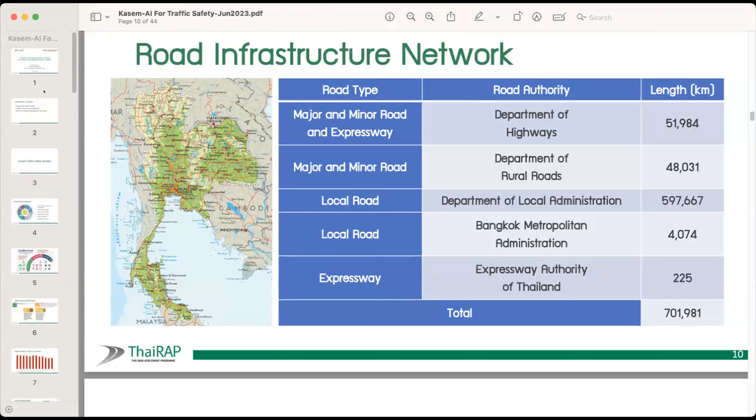And good morning, our colleagues and friends from the UK. Thank you very much for the introduction, Dr. Garavig. My name is Kasem Choocharukul. I'm actually a professor at the Civil Engineering Department at the Faculty of Engineering, Chulalongkorn University. And at the same time, I'm leading the Thailand Road Assessment Program, or shortly ThaiRAP, here in Thailand.

I have about half an hour to speak today, and what I would like to cover is the overview of the road safety situations, especially for those of you who are in the UK and might not be familiar with the Thai traffic situations. And then I will briefly discuss the Thai Road Assessment Program. And in essence, I also would like to talk about the potential of using artificial intelligence data to be applied for the Thai roads. So let's get started. These are the three things that I would like to cover today.

First of all, before getting into details on the road safety situations in Thailand, it's good that we all understand and are on the same page about the safe system approach. This is not new, I would say, and every country has already embraced this kind of concept. We believe that death and serious injuries from traffic crashes are unacceptable. We know that humans could always make mistakes, so that's something that we have to keep in mind.

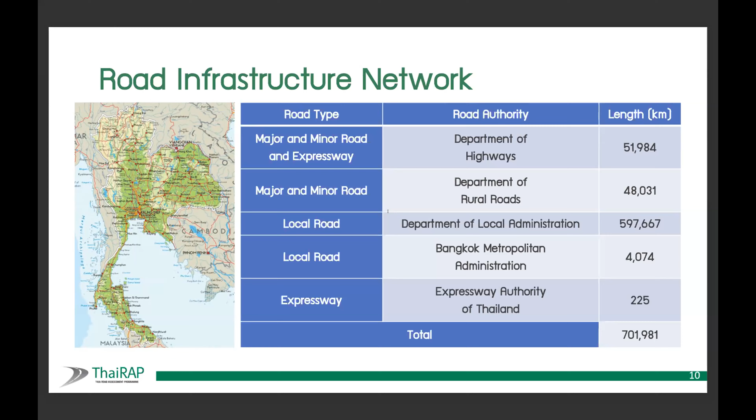That's under the Department of Highways, and it accounts for around 51,000 kilometers of the total road network. Now, coming to ThaiRAP: before we talk about ThaiRAP, everyone should understand what iRAP is. iRAP stands for the International Road Assessment Program. This is a registered charity, so it is a non-profit organization, with a vision for a world free of high-risk roads, and it's being supported by many agencies.

Mainly the FIA Foundation, and the responsibility of iRAP is to assess road conditions in terms of the road infrastructure. And so far, more than 100 countries have already incorporated this idea, the iRAP star rating assessment, for road assessment in their own country. And a lot of kilometers of highways have been assessed under this program.

And you can see that in addition to iRAP, we have some countries with their own RAP, that's the local identity under iRAP. And we can see here, ThaiRAP is one of them. In Southeast Asia, we have ThaiRAP, that's the Thailand Road Assessment Program, and MyRAP for Malaysia. EuroRAP started actually in Europe in 1999, and then we have AusRAP in Australia, usRAP in the United States, KiwiRAP in New Zealand, and then iRAP was actually established in 2006. And then up to 2012, up to 70 countries worldwide had incorporated this concept.

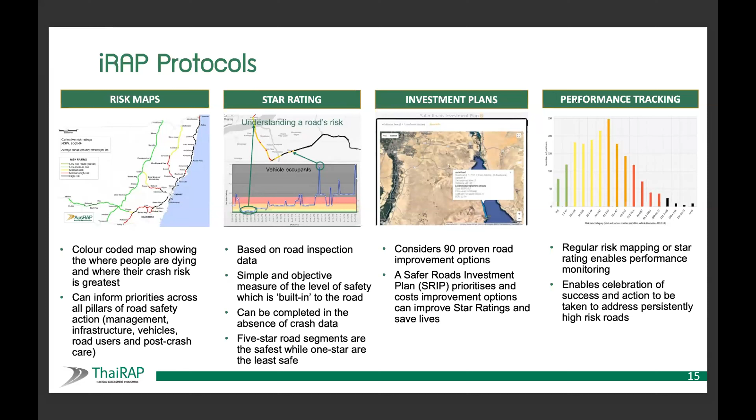Given the road condition that we have assessed, what would be the good countermeasures in terms of economic effectiveness, in terms of the investment, in terms of, let's say, the benefit cost ratio? If you spend $1 or 1 baht, what's the return in terms of the investment plan here for road safety? We also consider the performance tracking from past to present and to the future in terms of target setting. What should be our standard in terms of road safety? So this is something that we call the ThaiRAP protocols.

Let me explain a little bit more on the ThaiRAP or Thailand Road Assessment timeline. It started in 2015. At that time, we evaluated the road network in Phuket Island or Phuket Province. That was done by AIT, Asian Institute of Technology. And then during 2016, we got the budget from Bloomberg Philanthropies, and we worked together with the Bangkok administration, focusing on 3 areas in Bangkok. That's basically the start of the ThaiRAP program here. We focused on assessing Silom Road, Yaowarat Road, and Asok Montri Road at the time.

And then we further extended our collaboration with other road agencies in Thailand, like the Department of Highways and the Department of Rural Roads, and we have conducted up to now more than 1,000 kilometers of road assessment already. And you have seen the figure above already. That's ThaiRAP being part of the regional road assessment programs.

And on the lower part here, our Faculty of Engineering, we are honored to be one of the IRAP Centers of Excellence, along with other road research agencies. In the UK, that could be TRL, and we have some other road agencies also being part of what we call the IRAP Center of Excellence. So this is the entity that will look at the model inside, how we assess the roads, what are the important variables, and how impactful those variables are for road safety risk. So it's our honor to be there as one of the IRAP COEs also.

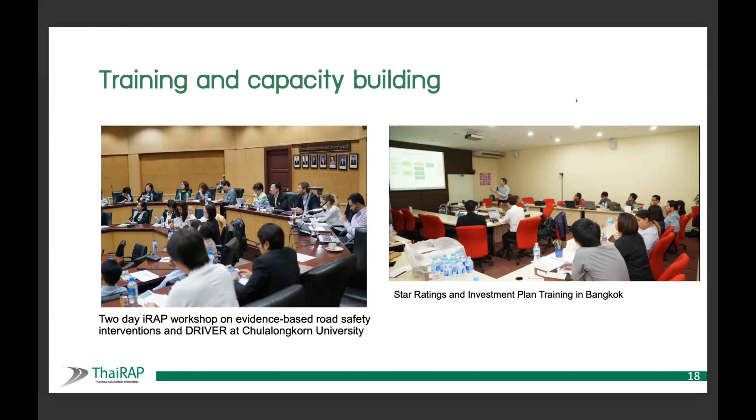So from the past up to now, we have performed trainings and capacity building, as you can see from these photos. And we have a lot of sessions going on, like introduction to IRAP, the IRAP assessment, how to manage IRAP projects, how to perform the IRAP star ratings and safer road investment plan, and so on. We also introduce the road safety audit to officials under the road agencies in Thailand. Like this one, we had the session on road safety audit for people under the BMA, the Bangkok Metropolitan Administration, in the past.

And we also have collaborations with other related road agencies. In Thailand, we work with some other universities as well, like Chiang Mai University and AIT. For the government part, we work with the Department of Rural Roads, Department of Highways, and the Bangkok city. Internationally, we work with MIROS, which is the Malaysian Institute of Road Safety Research. That's under the ministry, the government part in Malaysia. We also work with ChinaRAP, the road assessment program established in China, and similarly IndiaRAP also. So that's our collaboration so far.

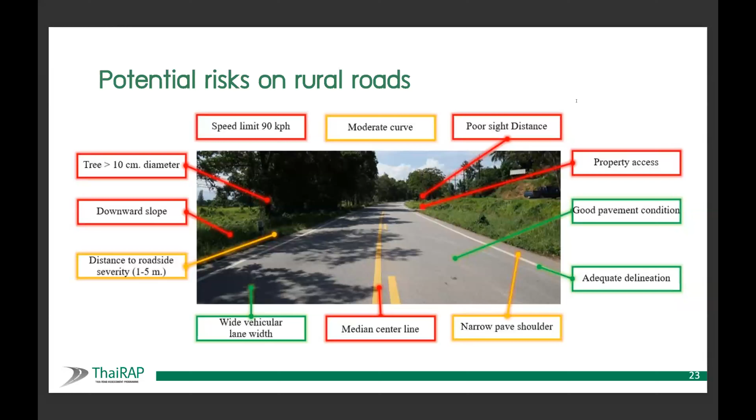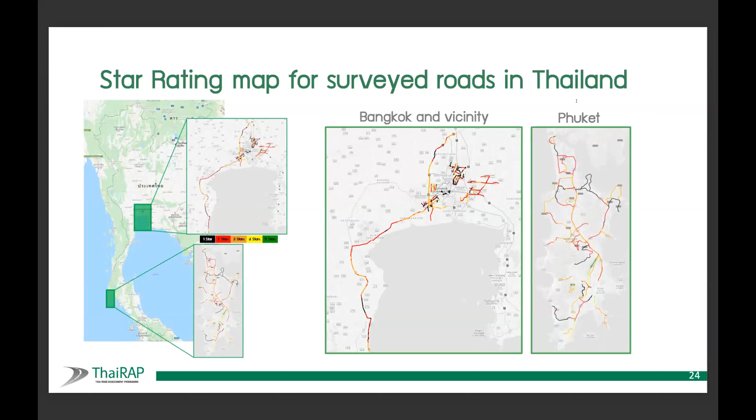Well, in terms of the result, as I said, we have already surveyed some of the highways and roads in Thailand based on the iRAP star rating concept, mainly in the Bangkok area and also in the Phuket area here. You can see by the colors of this mapping, green representing 5-star. You don't see any green here. 4-star represented by yellow, 3-star the orange color, 1-star black, and 2-star red. So you can see that most of the highways in Thailand are not that safe. So this is the evidence base. In the past, we would just say it's not safe, but we didn't have any evidence. But based on the assessment, which is consistent across all countries in the world, this is what we found. It's still not safe.

Well, why do I have to show this? Because this is the evidence showing that there must be something that we have to do. This is the evidence that we found from the road assessment. Pretend that you are a patient going to a doctor; the doctor cannot prescribe you any medicines without knowing why you are sick first. This is the symptom. We know already what really happened. So the solution is to provide suitable and appropriate countermeasures to get rid of these black and red areas. We want to achieve the World Health Organization road safety targets: 75% of the travel being on 3-star or better roads. So we have to somehow reduce the 1-star or 2-star areas for all road users. That's something we have to keep in mind.

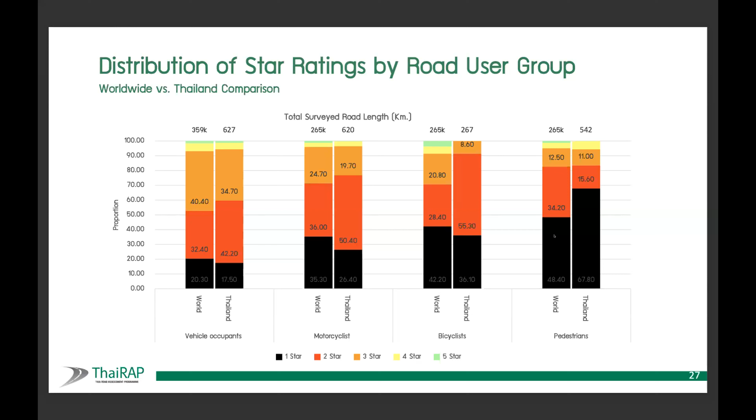Comparing Thailand to the worldwide data, the worldwide data is on the left-hand side, Thailand on the right-hand side. If we look simply at the sum of the black one and the red one, that's the unsafe situation, 1-star black, 2-star red. Every bar in Thailand is higher than the world average. That's why we have such an outcome, with a lot of fatalities, as I showed earlier. Every year almost 20,000 people die on our roads. So we can blame something on the road infrastructure, in addition to the vehicles and road users.

Now, let me quickly move to another part. That's the AI RAP and the potential applications for Thai roads. Before going in more details, let me briefly show you the attributes or the variables that we need to use in order to get the star rating. There are a lot, more than 80 attributes here.

Imagine that you have to do this coding for every road in order to find out how many stars your road has. It's very time consuming and it's very tedious. In addition to that, you have to get to know all of these attributes and how to do the coding consistently with the standards and specifications.

Here, the problem is for one road section, we have to perform the road assessment every 100 meters. So every 100 meters, you have to assess 4 road user types. For 1 kilometer of road section, you have to do it 10 times already. What about if we would like to know the overall road network in Thailand or in one certain country? Well, that would take a lot of time and effort to do all of these codings in order to come up with the star rating attributes.

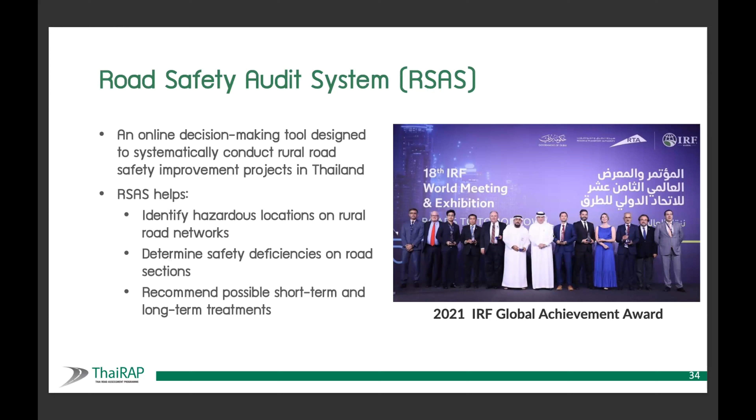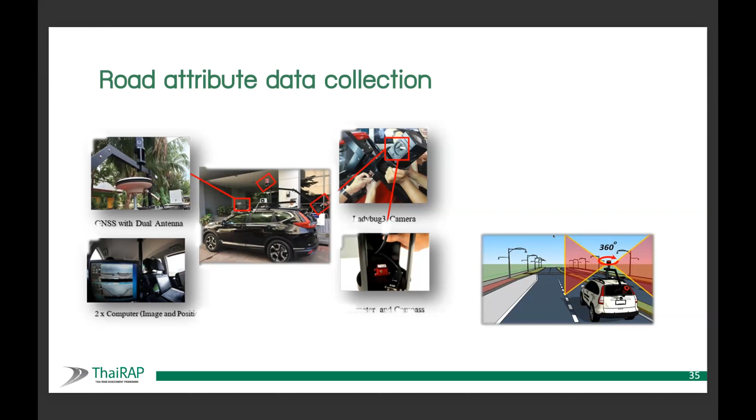So actually, this is incorporated as one tool, and they call it the Road Safety Audit System, or RSAS, under the Department of Rural Roads. And they just got the award from the IRF in 2021. They used some of the vehicle inspection data along with cameras and sensors and so on under the DRR initiatives. And this is the software where you can measure the distance. You can look at the data like Google Street View, but this is their own software.

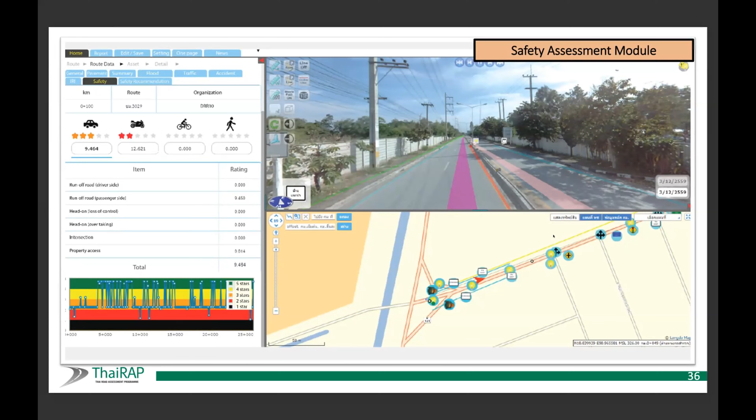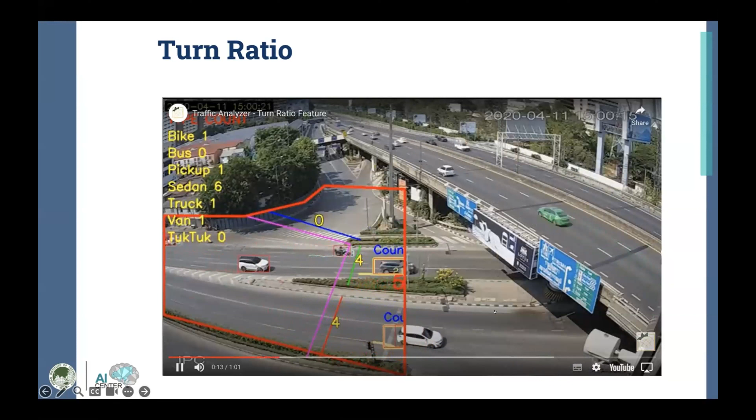In this one, we use the survey camera to tell the turning ratio. We tell how many vehicles turn left, this lane goes straight, and this one turns right to the expressway. And we could count by vehicle type: bicycle, bus, pickup, sedan, truck, van, and three-wheel vehicle, which in Thailand we call tuk-tuk.

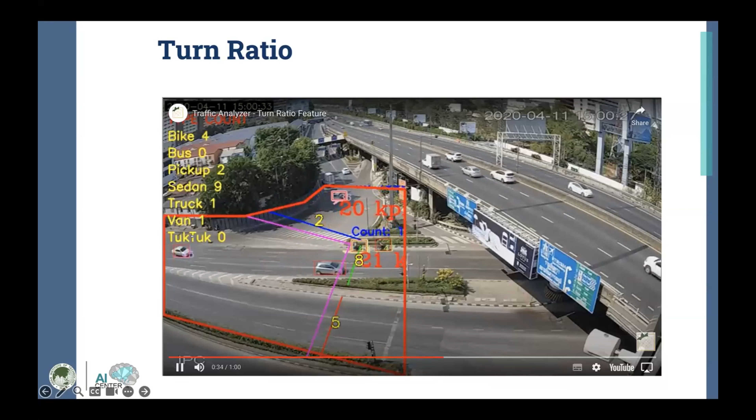This is the traffic information that we get from the system, including vehicle count, vehicle type classification, queue length, and turning ratio. This one is the mini camera that we installed on Rama 4 road. This is the technology I mentioned.

For license plate recognition, in the early days AI systems used this technology to read license plates, either for entering a gate or for surveillance applications. I'm not sure, it's quite small, but I'll show you. In this one you will see the license plate reading information.

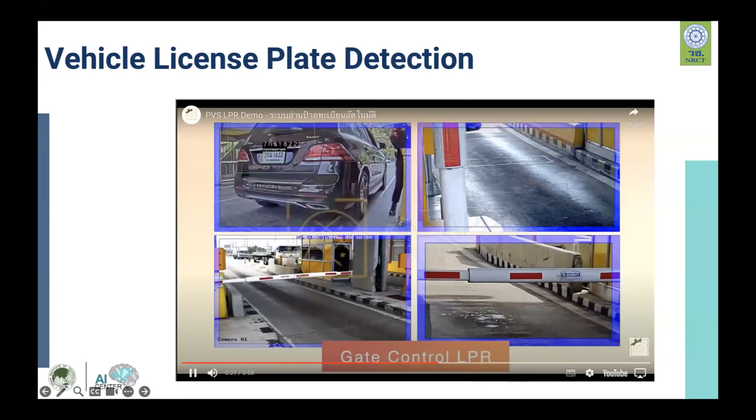We also work with the stolen vehicle police to do the same thing, but install the camera on the police vehicle so that they could drive around the city and use the camera installed on the police vehicle to detect any blacklisted, any stolen vehicle.

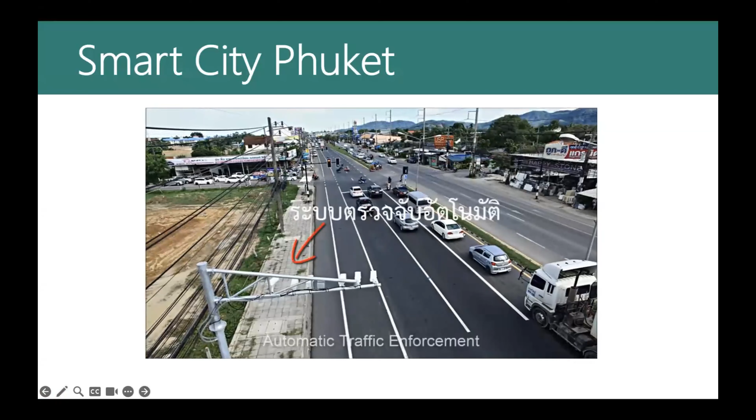And then we prepare the data for the ticketing system so that the police could use it to issue the ticket. This one is the installation site. We installed it at 9 junctions in the Phuket area.

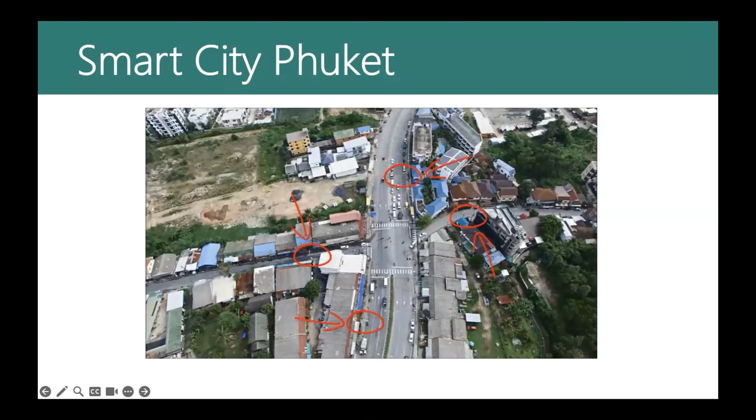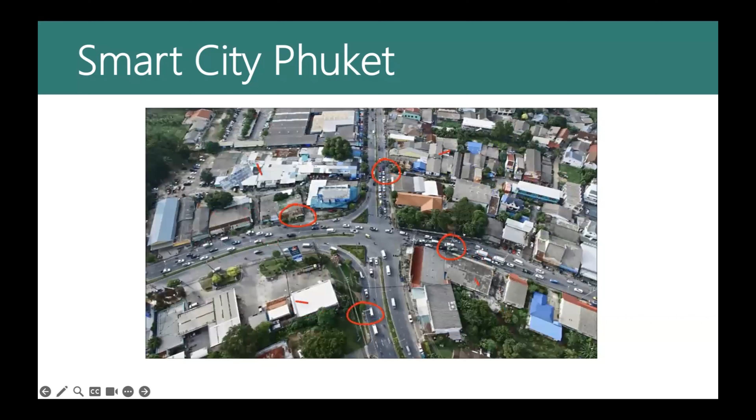This one shows the system that we use. It has cameras, and we also install radar to detect vehicle speed, because under the police requirement to issue a ticket for a speeding violation, you need either laser or radar.

These are some sites where we already deployed the red light violation system, including Phuket, Lopburi, Chachoengsao, Nakhon Sawan, and Udon Thani.

This one also uses AI technology to detect lane change violations. If a vehicle crosses the line here, the system automatically detects it and sends the data to the traffic police. This problem could cause accidents and traffic congestion, and it violates traffic law.

This shows the example of the system in the Huai Khwang area in Bangkok. Then we define the processing region. Then once the vehicle crosses this region, in this one we have the overview cameras, and then HD is the high definition camera to try to read the license plate in those areas.

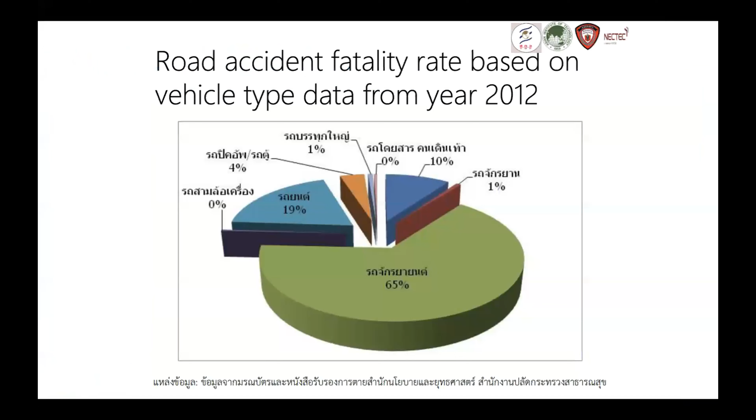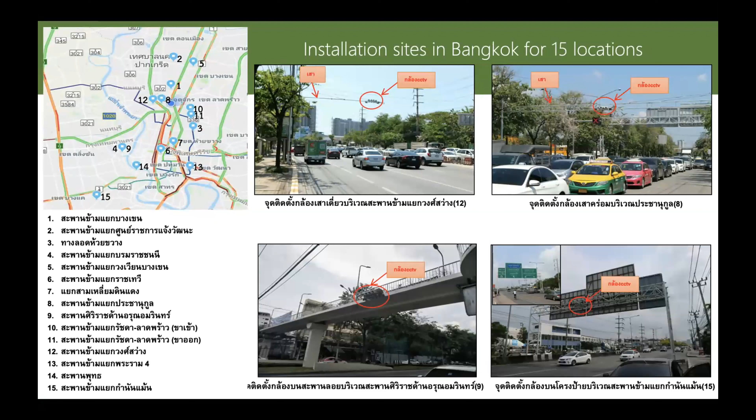Then these are the 15 locations where the system is installed in the Bangkok area. And then this one, we also deploy the no helmet wearing violation detection system. This one we deploy in Phuket and Udon Thani province. Then if there are motorcyclists that do not wear a helmet coming into the detection region, the system will detect and alert automatically.

Then we get the picture of the violation and then the license plate information. And then we send this data to the traffic police. This one is a 5 second video of the violations.

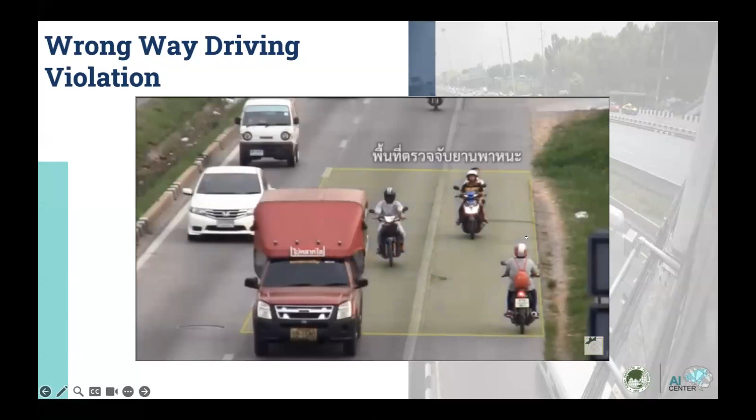And then this is another violation that we see often actually in Pathum Thani, the wrong way driving violations. And it's quite dangerous in Pathum Thani when you drive over there. Then this one, we detect the wrong way driving, and then we collect the evidence and send this to the police.

Then this one is the work that was done with Dr. Kanavi. This one we call point-to-point speeding violation. We installed the system on the Don Mueang Tollway. In the past, the police had to use the laser gun to check the speed of the vehicle and then issue the ticket.

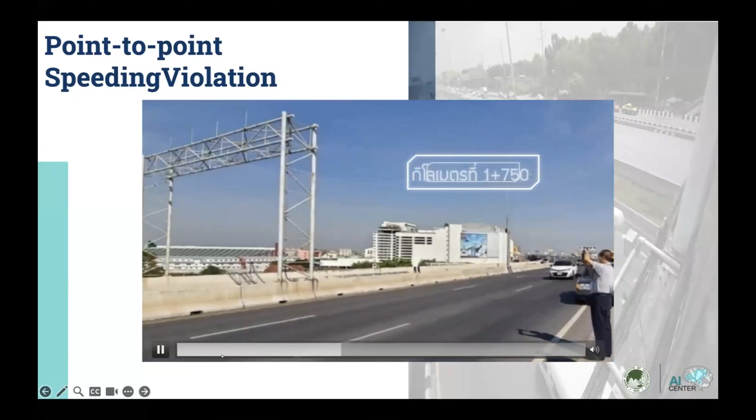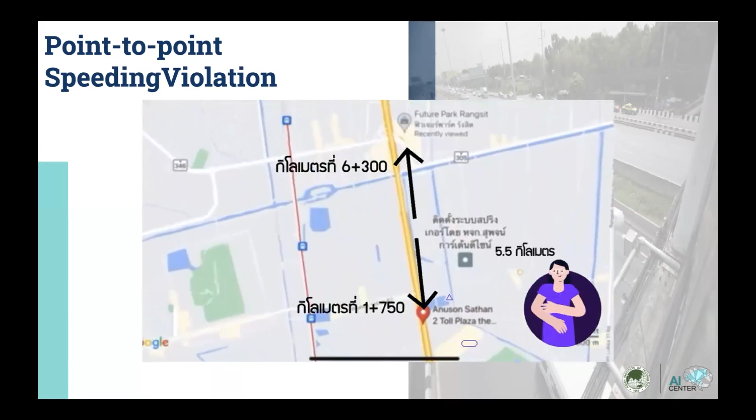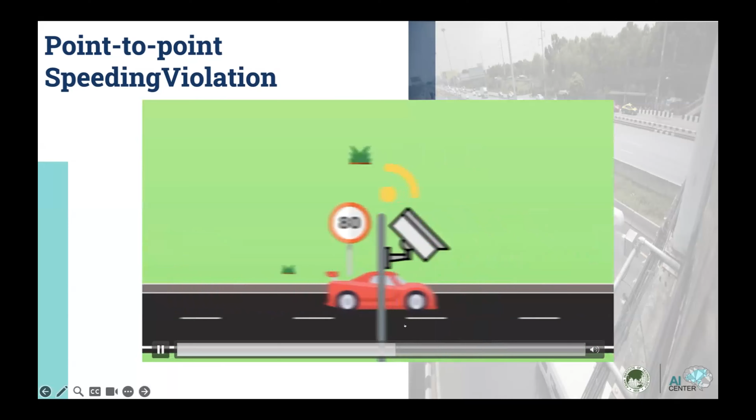Then we install the cameras in two locations on the Don Mueang Tollway. The distance between them is around 5 kilometers, 5.5 kilometers. And then once the vehicle passes, let me check. Okay.

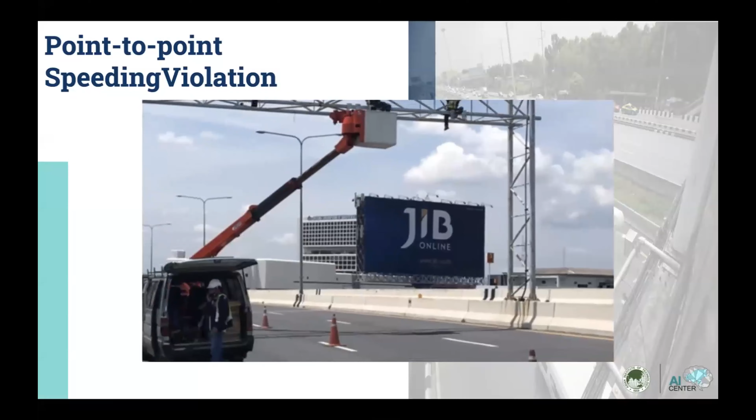Then once the vehicle passes the first location, we collect all the license plate information. And then once it passes the second location, we use the difference between the timestamps to help calculate the vehicle speed, right? And then from that, we can check whether the vehicle violates the speed limit on this 5.5 kilometers or not.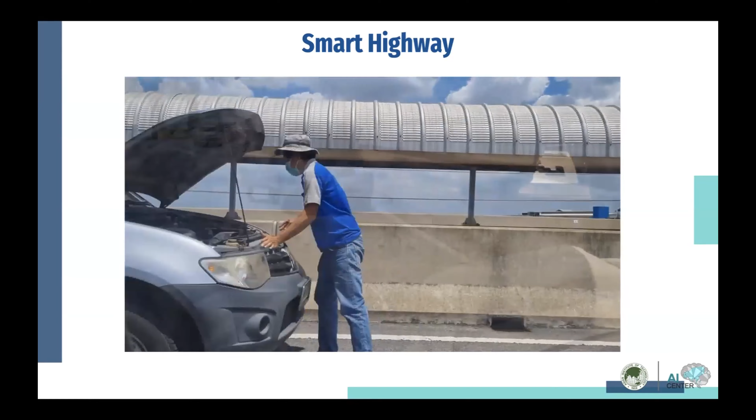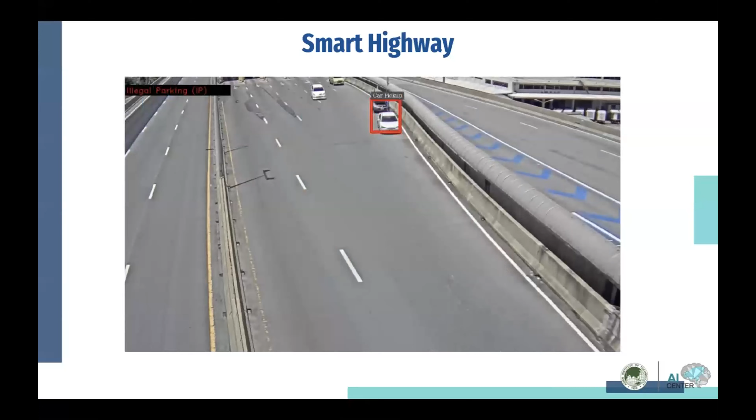Then we use the AI system with deep learning. The anomalies include parked vehicles on the tollway, wrong way driving, falling objects, and humans on the tollway. We also collect statistical information like vehicle speed, vehicle type, number of vehicles, and use that to update the map in the control room of the Don Muang Tollway.

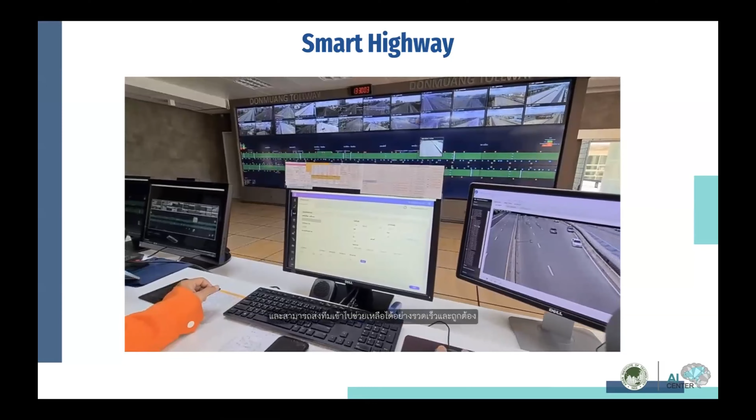Then this one is the control room. The green region means that the vehicle speed is quite good, right? Otherwise it can change to orange color and then red color. The blue dots on the map are where the cameras are installed. Then if an anomaly is detected, it alerts as shown on the video wall.

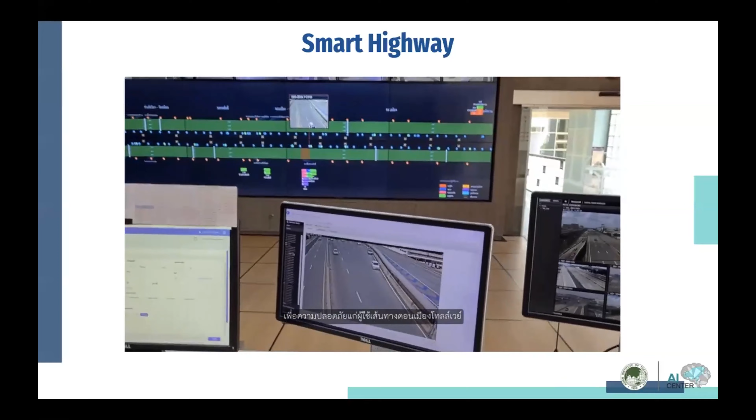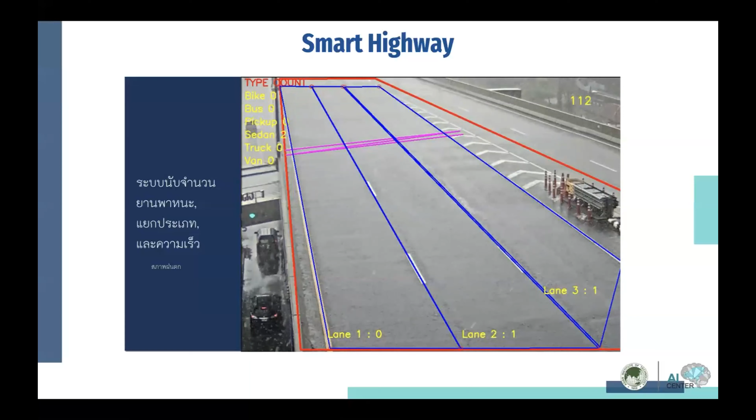And then the security guard can dispatch the rescue team to help those who have a problem with their vehicle or to collect the falling objects. And then during the testing time, Don Muang Tollway tested during rain at night time, rain at daytime, and so on to check the accuracy of the system.

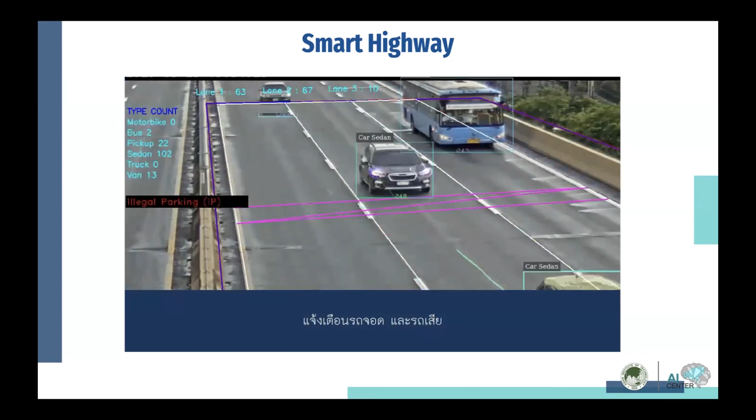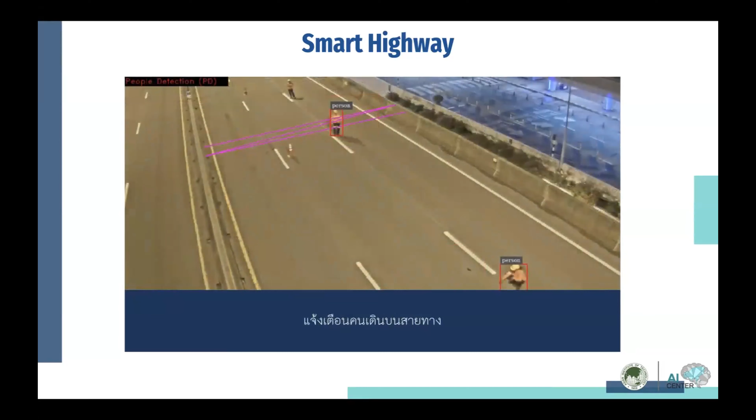Then this one is an actual scenario when there is a bus that had some problem with its engine, right? And the system could detect it automatically. This one is wrong way driving, but it's by the DMT vehicle themselves. And then this one also detected a human on the tollway. And this one is the police motorcycle.

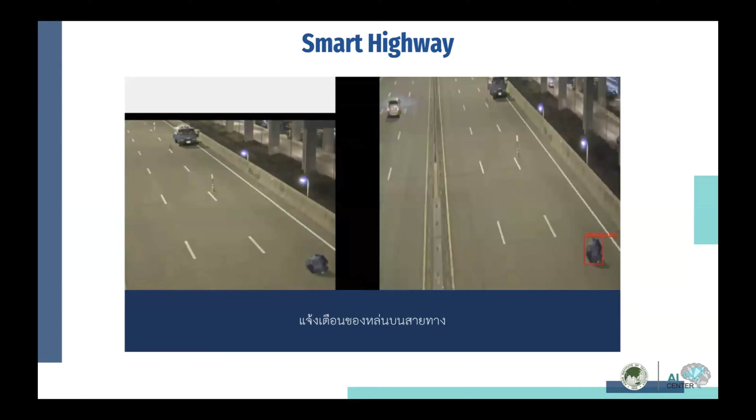It also detected it. Then this one detects a falling object, but it's a set up scenario where the Don Mueang Tollway people go and open an umbrella. And then this one, the system is tested by a company in Japan. Okay.

Then this one, we also install a similar system, but this one is on the Chanchuli Tower. This one is for the Ramapho project. If there is any accident or any stopped vehicle on the Thai-Japan bridge, right, then the system will alert the officer. Then in this scenario, in the real scenario, that system could detect automatically. There is this vehicle that comes and stops in the middle of the road.

And then these are some examples of images that we could capture from the Thai-Japanese road, Thai-Japanese bridge. And then this one is to detect the motorcycle accident, right, using the AI. And this is the actual scenario.

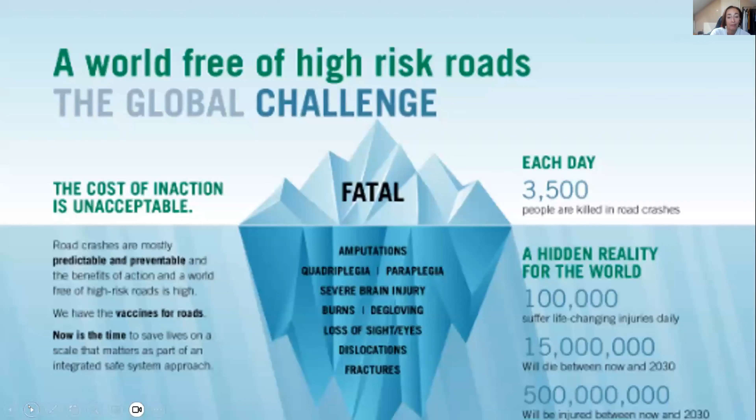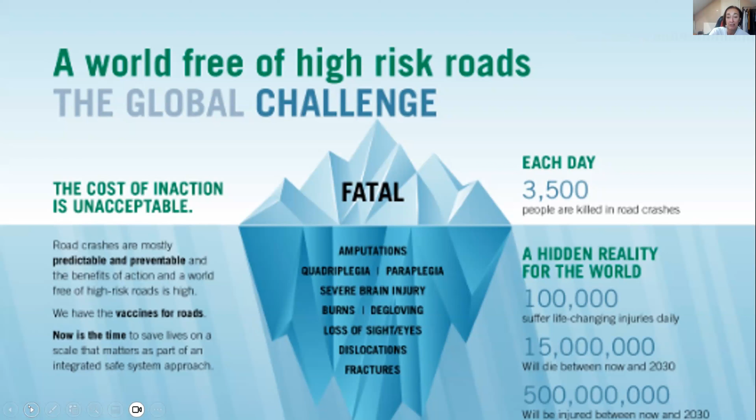And it was very interesting listening to the ThaiRAP. I'm very familiar with the ThaiRAP programme. And yes, we do want a world free of high-risk roads. And we know that things like the fatal collisions are only the tip of the iceberg. For every fatal there is what they call a whole hidden reality of things like amputations, quadriplegia, paraplegia, brain injury, where there is actually no end point for these people, and these disabilities carry on throughout life. So these are a huge burden to individuals and society. So fatals are one thing, but there are many other incidents that happen after this, and we need more data on them.

So hearing some of the horrendous numbers in Thailand of fatalities, these may look very small figures to you. But for example, in Great Britain in 2021, 111 pedal cyclists were killed, and 4,000 reported to be seriously injured. And again, as I say, seriously injured could be head injury, it could be amputation, and life-changing injury, which, as I said, has no endpoint. Another part of my research is looking at the consequences of these injuries for people, and we know that they continue throughout life and affect people's well-being. So in London, only 7 people, I say only 7 people, killed, and nearly 4,000 people were in the bracket called killed and seriously injured.

But we also know that, especially during the pandemic, cycling journeys increased hugely. And I was very interested to hear from the previous presentations by Dr. Kasem and Mongkol that getting that exposure data, how many people are actually out there doing things, is a very expensive part of survey work. And if we can automate that, that's really, really important. So we need to contextualize these injuries amongst how many people are doing this activity. If many, many more people are doing it, it may look like there's an increase in casualties, but actually it's become safer.

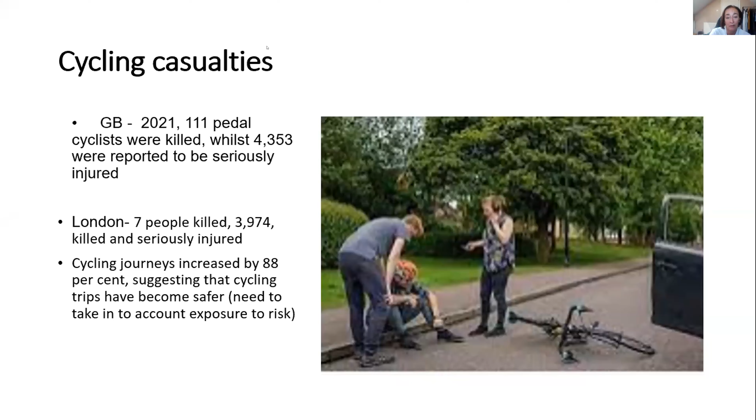I hope everyone can hear me. Okay, good. So, oops, sorry.

To actually get data on something that's a relatively infrequent occurrence is quite difficult. So I was involved in a piece of work that looked at historical data over several years in order to understand these risk factors in depth. So we looked at police fatal files. These are in-depth investigations where they'll look at the behaviour of the cyclist. Was there any CCTV surveillance available for where the collision happened? And this is based in London. Understanding the collision partners: what were their behaviours? If they were lorry drivers, where had they been delivering? At what stage in their delivery shift were they? To get the full understanding of this.

So these are the very infrequent events. Fatalities are just the tip of the injury iceberg. And for every fatal file, and we had to go through a huge amount of ethical procedures to be able to access these, we supported it also by looking at the Google Street View of the location to see what the location was like and what countermeasures had been put in as a result. So this is 5 years of data that yielded 79 fatal and life-threatening collisions. There were only 1 or 2 life-threatening collisions involving cyclists, where people had lost limbs. But there were only 53 available for analysis. The reason for this is that if there are ongoing legal proceedings, we're not allowed to look at the cases because they're not complete cases. And this is something that will probably happen in any country.

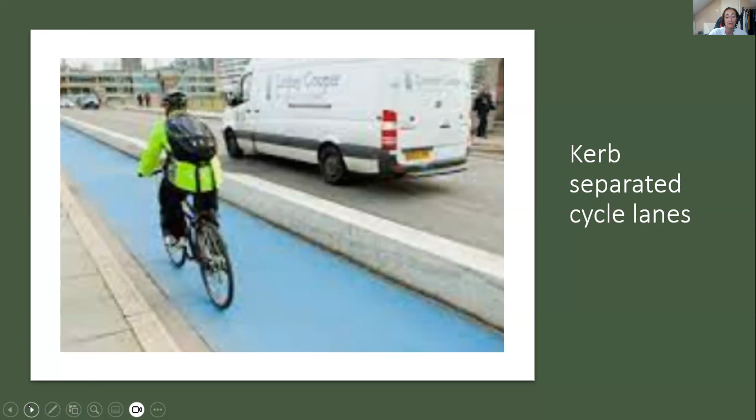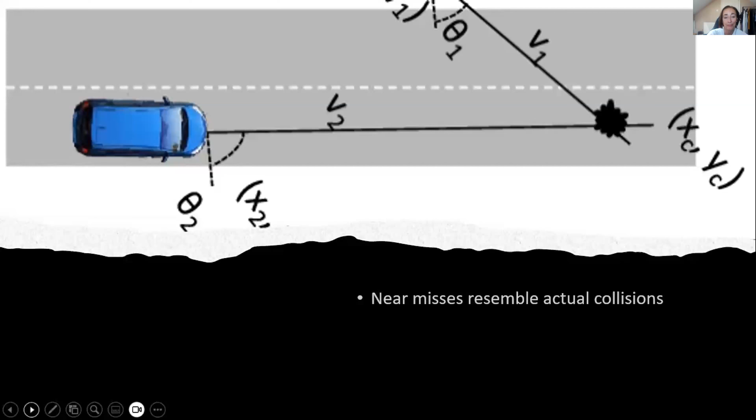So taking that in mind, we can work on understanding these more numerous data to inform our understanding of risk factors. So as I said, ideally with some kind of AI, we can actually start to predict actual collisions from understanding near-miss data. And this is a project that James will talk about a little bit later.

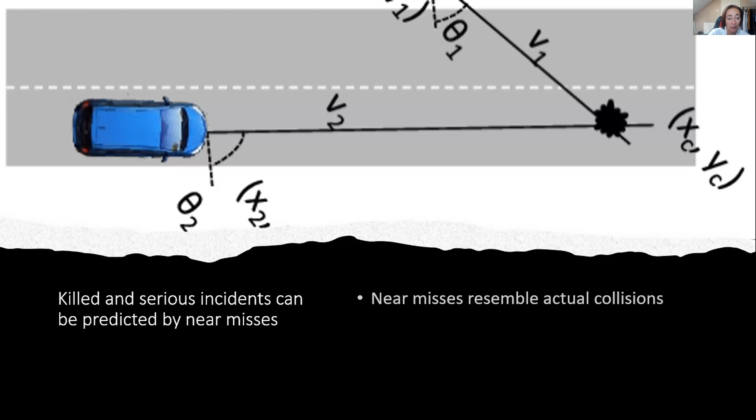And you need to conceptualize safety events within a safe system. I'm sure many of the Thai participants will understand the safe system. So this is really about safe roads, safe speeds, safe road users, safe vehicles, and post-crash care, so that there is an emergency response that can get to those people very quickly. And so we need to understand all aspects of these factors, and we need to understand safety culture. Now, safety culture is very close to my heart because I do a lot of work on occupational road safety.

And I would say that my work looking at motorcyclists in the gig economy in the UK and the tech companies that support that kind of work is pathological. They don't care about people's safety. They produce work that's highly pressurized, with no safety training, and people just go there and do the work, and we know that they report more risk than an ordinary cyclist. And I would describe the next level up as reactive.

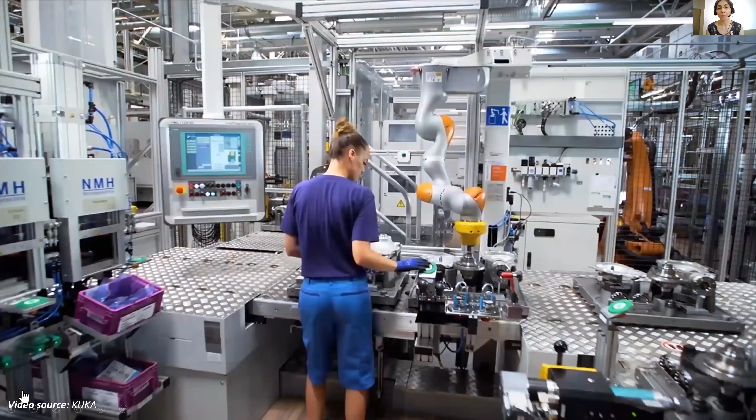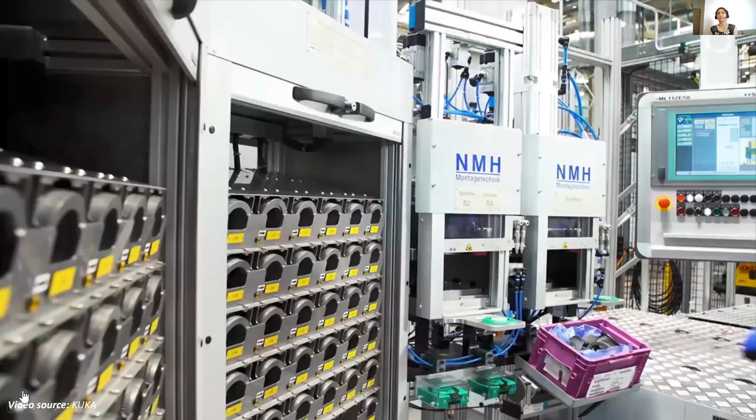This trend has moved to collaborative robots, and here you see an example from KUKA, where humans are safely working alongside robots. And for this type of robots, a new generation of robots, collaborative robots or co-robots, have been generated, and the trend continues this way.

Robotics and automation has been also supporting transport and mobility services, and I give a few examples here to you. For instance, the autopilot in commercial flights, which have been introduced from 1912. Most of you might not be aware, but when you are traveling from A to B using an airplane, 90% of the times they make use of autopilot while getting you to your final destination.

Another example is the automated metro system, which has been around since the 1920s, and one of the examples is London's Victoria Line, which is the world's first newly built full-scale automated railway. And this trend continues towards autonomous vehicles, where there have been experiments for over 100 years. And now we are at the stage where different levels of autonomy are in place, and people basically agree on definitions of different levels of autonomy.

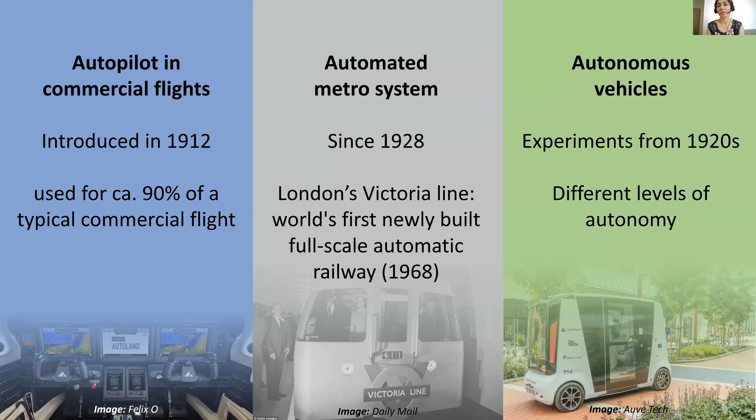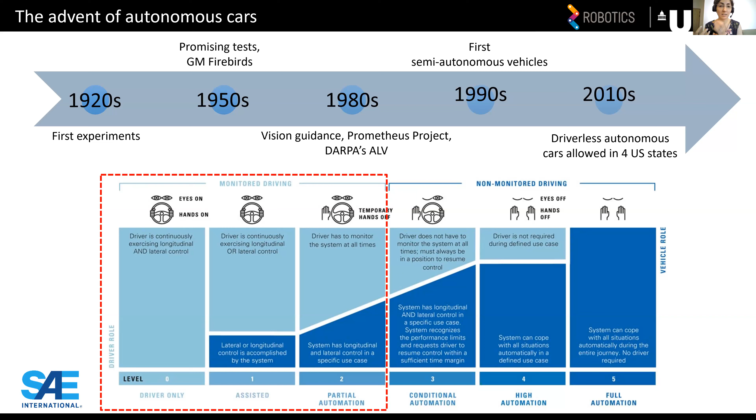Many of you might be familiar with this, but I quickly go over the definition from SAE, which talks about levels of autonomy ranging from 0 to 5, 0 being fully manual and 5 being fully automated, where you almost don't need the driver anymore. On our roads at the moment, we see commercial vehicles with up to autonomy level 2, where the driver still needs to be engaged in the driving task and observe the environment and monitor the system at all times.

However, last year, Mercedes-Benz introduced the first internationally valid system which is approved for conditional automation, or level 3 automation. What is important here to note is that they highlighted that this type of vehicle is suitable for motorway sections where the traffic density is high. The vehicles are also not allowed to go more than 60 kilometers per hour on these motorway sections; the legally permitted speed for this type of vehicle is 60 kilometers per hour.

There have been many predictions regarding the revenues that these vehicles can produce. I'm just bringing an example from McKinsey & Company, where they have said that advanced driver assistance systems and autonomous driving systems could create $300 to $400 billion in revenues by 2035. They said that autonomous driving could produce substantial value for drivers, for the auto industry, and for society.

Within my team, we are interested in looking into integration of autonomous vehicles and systems into our society. So on one side, we look into integration of autonomous shuttles into our urban environment. And on the other side, we look into creating human-centric, intuitive interfaces for autonomous vehicles, where we are trying to help drivers with the task of handover when it comes to highly automated vehicles.

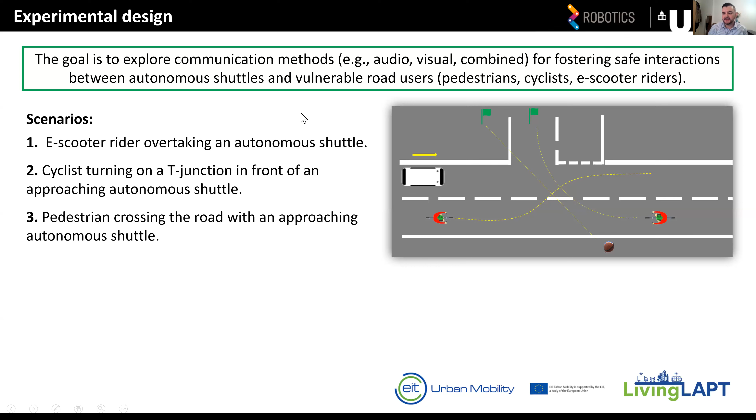So the first scenario was an e-scooter rider overtaking a slowly moving autonomous shuttle. The second one was a cyclist doing a right turn at this intersection in front of the incoming autonomous shuttle. And the last one was a pedestrian crossing the road in front of the shuttle. And the experimental design was very simple. Next, please. It was a 4x2 factorial design. We had 4 means of communication and 2 environmental conditions.

So we had nothing, meaning there was no communication from the shuttle. There was visual communication by means of a laser projection. So we had the laser attached to the front of the shuttle, and it was projecting a red line onto the floor in front of the shuttle, indicating a space in which the shuttle would brake intensely should something come in. We had the audio message playing from the speakers on the shuttle. This was an AI-generated male voice saying, "Mind the space" in front of the shuttle. And we had the combination of audio and visual.

In terms of the environment, we had night and silence within the lab. The other one was very bright daylight, plus traffic noise being played in the environment. So now I want to show you in the next slide a video recording of what one of these experimental runs looked like. This was during the night. You can see the laser projection. I'm not sure if you will be able to hear the message, but it's saying "Mind the space" in front of the shuttle. As this e-scooter overtook, the shuttle slowed down, it was braking, and then it continued its journey.

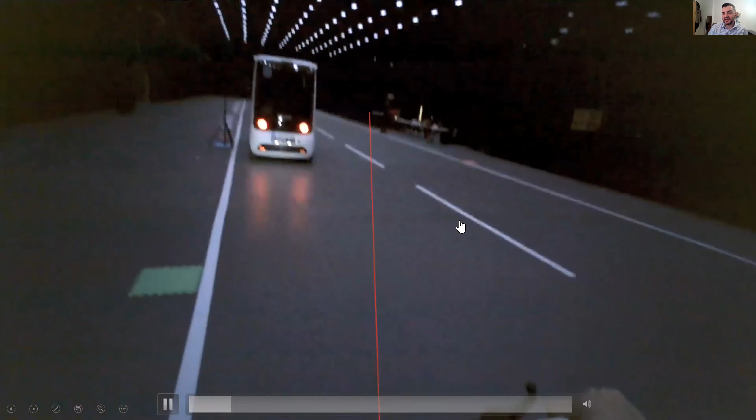So now I want to show you the same thing, but this is the first person view of the same e-scooter rider. This was recorded with eye tracking glasses. And what they also give you is this red point showing what the person is focusing on.

So hopefully you can see that this participant did notice the laser projection as they dwelled for a while on that point. So we had 8 experimental runs for each participant. And then we did a short questionnaire, which we gave to the active participant, in this case, the e-scooter rider. And we also gave the questionnaire to 3 people sitting inside acting as onboard passengers.

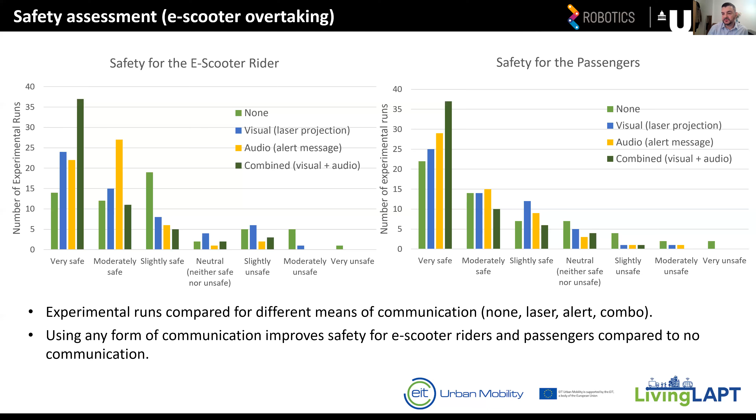And the first question was, how safe did you feel during the interaction that you just experienced? So we are happy to see that our participants felt predominantly safe during these experiments. And there are some differences. So when nothing was used, there was no communication from the shuttle, it peaked around slightly safe for the e-scooter rider, but when something was used, either visual or audio, it became moderately safe, and with the combination, it was very safe. So this shows, if nothing else, the communication can improve the feeling of safety of road users and onboard passengers.

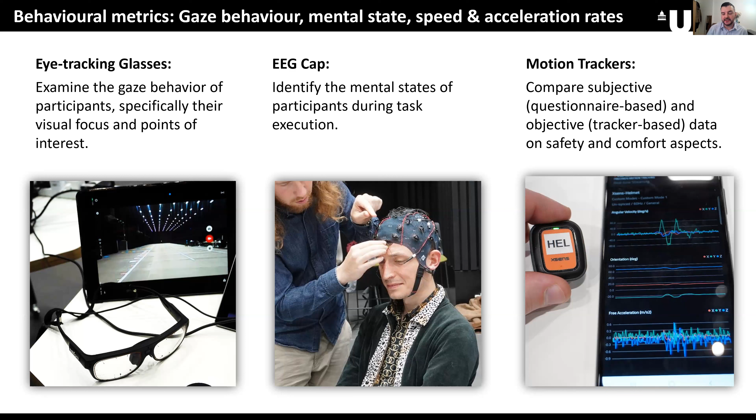We had eye tracking glasses for every active participant, as I've shown you before. We had an EEG cap for the pedestrian to record brain activity. And finally, we had motion trackers, these small devices that we put, for example, on the back of the safety helmet. So this recorded the orientation of the head, the free acceleration of the scooter, angular velocity. And we also put one of these devices inside the shuttle. So this gave us an objective measure of the intensity of braking, which we can then compare with the subjective ones from the questionnaire. And last but not least, we had lots of overhead camera footage of all interactions for all three scenarios.

So we intend to use AI to detect objects in the scene and then to quantify distances between active participants and the shuttle in the very moment of interaction. So for example, for the e-scooter scenario, we want to quantify the overtaking distance in front of the shuttle, as well as the lateral distance as they're approaching the shuttle. And this will answer one of the very important questions: did they or did they not change the behavior when there was communication from the shuttle, drawing attention to the space in front of the shuttle? So as soon as we know, we will make sure to disseminate these findings.

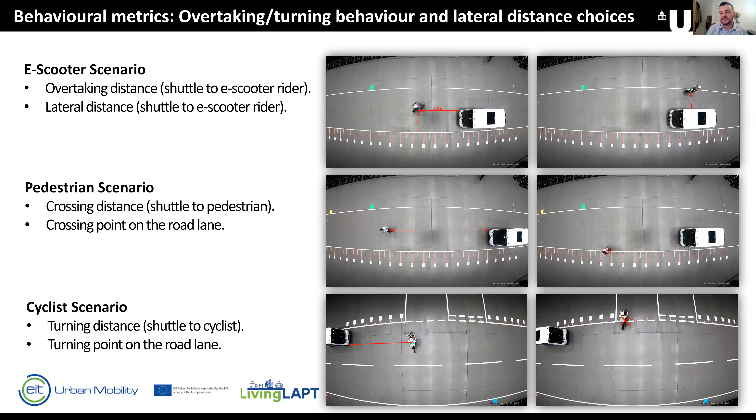You're muted, Bani. Sorry, thank you very much, Milan.

Now we are moving towards the second strand of research that we are looking into, which is on intuitive human-machine interfaces for autonomous vehicles. And within this topic, we are going beyond visual and audio feedback, which you see in commercially available autonomous vehicles. We have developed a haptic driver's seat, which Gianluca is going to talk you through, and I will hand over to Gianluca at this point.

Hi all, thanks that we can be here.

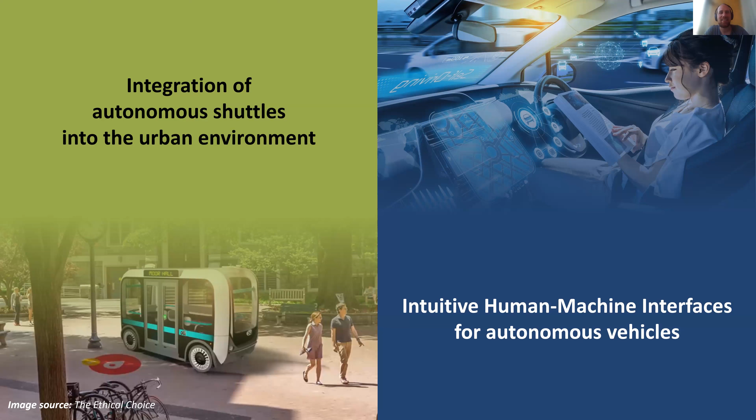Right, so we've heard just now that we now have first vehicles in autonomy level 3. So basically cars where you can hand over control to the car and you don't have to monitor the road around you at all times anymore. But this is conditional automation. So at one point the car will ask you to take back control if you're the driver. And obviously, if that happens immediately, you have no idea what's going on around you.

And that is then a very unsafe transfer, because imagine you drive on a highway, even if it's only 60 kilometers per hour, there's a lot going on around you. This driving task is, after all, a very dynamic task. So we're looking here at how we can make this transfer of control from car to driver more safe.

And one of the main ideas here is that we measure eye and brain activity of the driver in a driving simulator, and then employ artificial intelligence and machine learning to understand at any given point how much situational awareness, so to say, how much knowledge about the environment they have, and then give them appropriate feedback early enough so that they can take over the driving task in a safe manner. This is pretty much backed by research.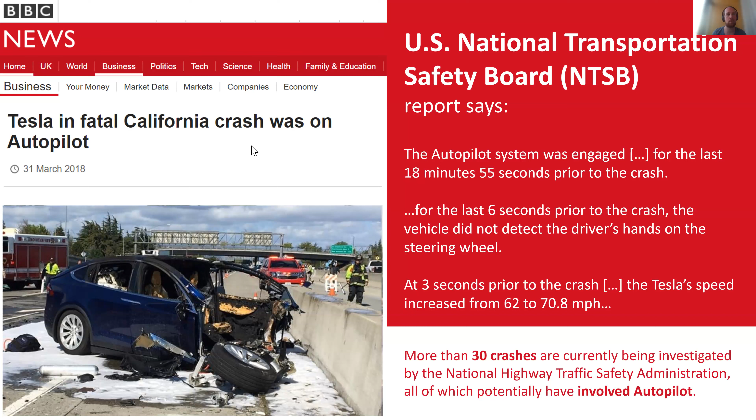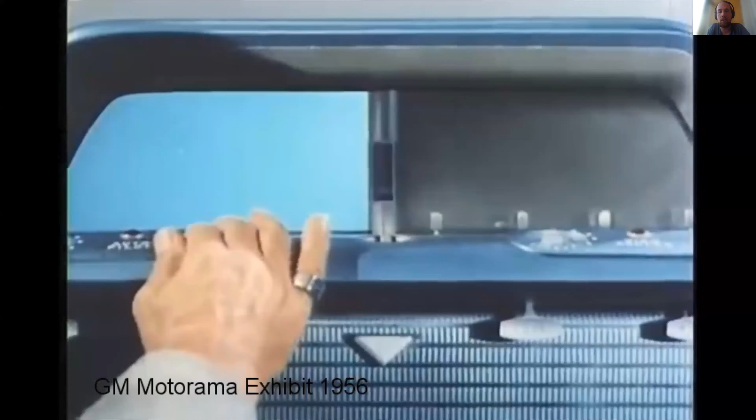So in 1956, GM had this futuristic vision, let's say, of some sort of road traffic control, just as we see it in air traffic, where we have air traffic control, where basically you switch to another lane and then you do some fancy stuff on your screen while someone talks you through that, and then you're suddenly in autopilot. Obviously with the amount of cars nowadays, we didn't go this way. There is no road traffic control where a controller would talk to you at every given point. So we're very much dependent on vehicle to user or vehicle to driver communication.

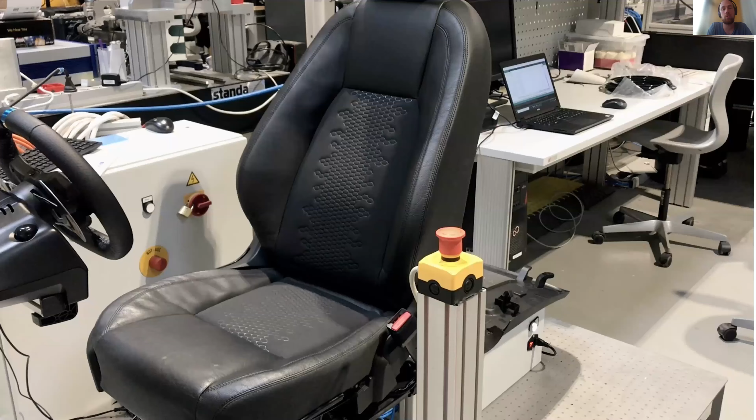And state of the art, as most of you might know, is visual and audio feedback. So visual means there's some sort of little icon on the dashboard, or maybe a bit removed, something bigger, some red screen popping up to tell you, please take over now. Audio is that you hear a beep sound of some sort that gets more and more alerting over time if you don't take back control. But now that you're actually allowed to engage in other tasks, so let's say you're allowed to watch a movie or something, you might not catch these. And this is exactly what these fatal crashes also show.

So we thought, why not build haptic feedback? So basically giving you feedback through a completely different sense. And then the only real connection you still have to the car is the driver's seat. So here you can see we have built soft robots, so to say little air cushions underneath the leather of a real driver's seat that then inflate and deflate to give you this mechanotactile sensing touch. And this research has been published already. It has won several prizes as well in national and international competitions, for example, by Ocado and the BMW group.

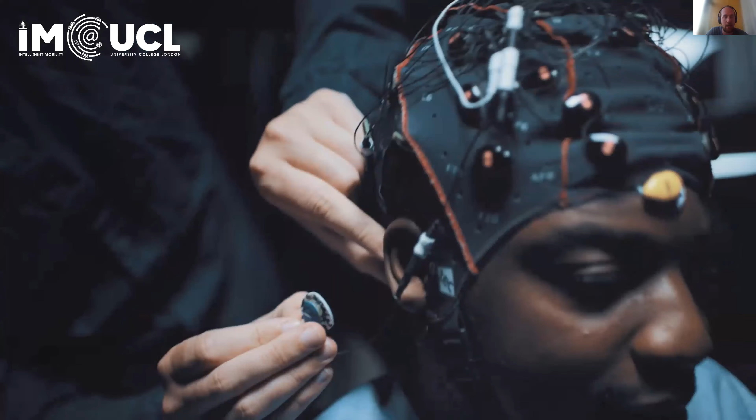So this is our facility in East London at UCL Pearl, where all of this comes together. So we have a real size car simulator here. It's a real car with a screen around that is plugged into our in-house developed simulation environment. And of course, we have audio and visual feedback there, but we also have the driver's seat in the car. So it's very immersive. The participants can't really see the edges, so they really think that they're sitting in a real car, which gives us just this hunch of reality, really, when we do our experiments.

So in a first step, we looked at how well the seat is received. And this is on the next slide as well. How is the acceptance? So to say usefulness and satisfaction. How do people perceive it? What is the intuitive feeling? Intuition is very big in driving, like intuition and experience. And how user-friendly and how effective is the feedback we give.

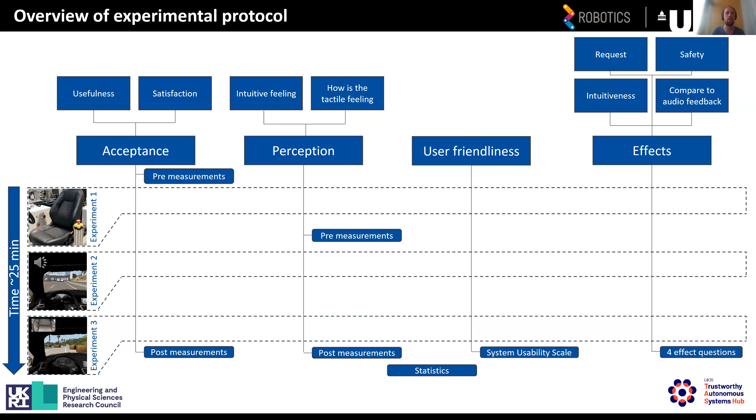And we then also compared it to results we had from a visual takeover system from a BMW 5 Series car. So very much something that is already in use. And ours almost all the time scored higher, both for usefulness and satisfaction.

So with these results, we then went one step further and we said, how can we understand how much situational awareness these people get, and can we get successful transfer of controls by giving the people haptic feedback on top of audio and visual feedback? And for this, we designed a highway scenario. The car is driving on the motorway. And the participant who's sitting in the car is reading a magazine the whole time. So they're basically very much removed from the driving task.

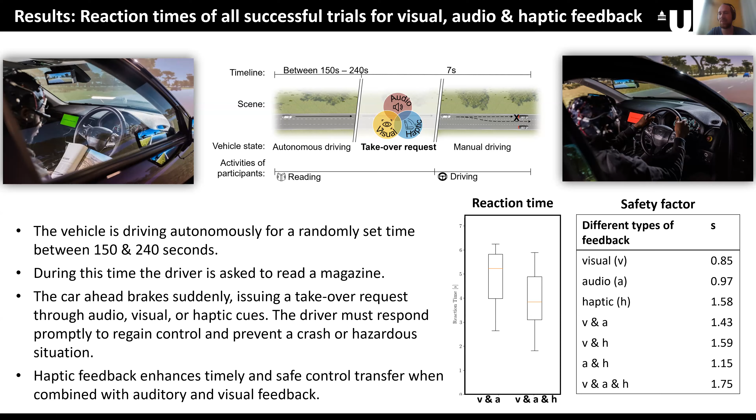Thank you so much. Thanks a lot.

And of course, these are some of the challenges that we are looking into, and there are many more challenges that within this field we are facing, such as issues of communication networks, vehicle to everything based communication, investments into the infrastructure, and also understanding complex social interaction, as well as management of edge cases where we have not specifically trained our systems for. They are rare, so it's difficult to collect data for those ones, but at the same time, they're very difficult to predict.

And of course, as most of you know, regulatory challenges that we are facing for introducing these technologies to our systems, integrating them, and making use of them in a safe manner.

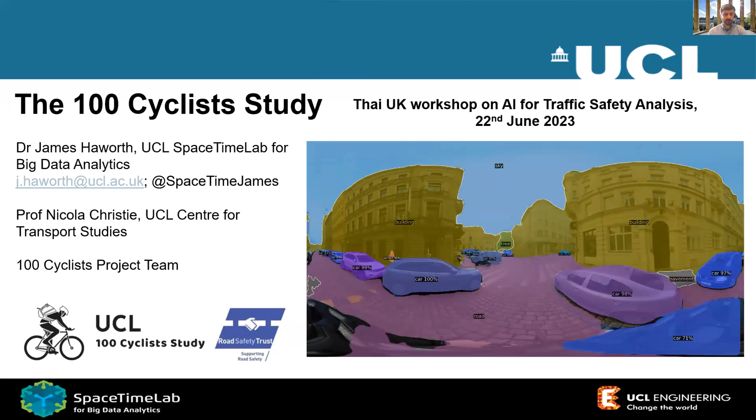So just a bit of background, and I think some of the other talks have alluded to this as well. Cycling is prioritized by transport authorities in cities because it's known to be a green transportation mode. Bikes take up less space than cars on the road. It reduces congestion, reduces environmental pollution, and it also has positive health outcomes for the individual. So there's obvious reasons why transport authorities would want to increase cycling as a transport mode, but in many places, not least London, but in particular probably places like Bangkok, uptake is limited by the perception of cycling as a risky activity. And as Nicola talked about earlier, casualty data tends to be limited because of the low mode share, so it's difficult to quantify risk.

And the point of our 100 Cyclists study was to collect data on near misses, which we define as a situation in which a person was required to act to avoid a crash, for example, braking, speeding, swerving, or stopping. And this is extended to include moments where the rider felt unstable or unsafe, such as close passes and tailgating. And close passes are known to be a problem in the UK. If you're an avid cyclist, you'll see lots of videos posted on YouTube and other sources of people being close passed on a daily basis.

Okay, so linking up to Bani's talk, I want to mention a little bit about vulnerable road users in the coming age of connected and autonomous vehicles. Bani showed the image from the SAE of the levels of autonomy from 0 to 5. There's a really good review that came out quite recently in Transport Reviews by Kapousizis and colleagues on bicycle smart technology. So this also has 5 levels, starting with 0 at the bottom, which is basically your average person going out on their bike for a ride.

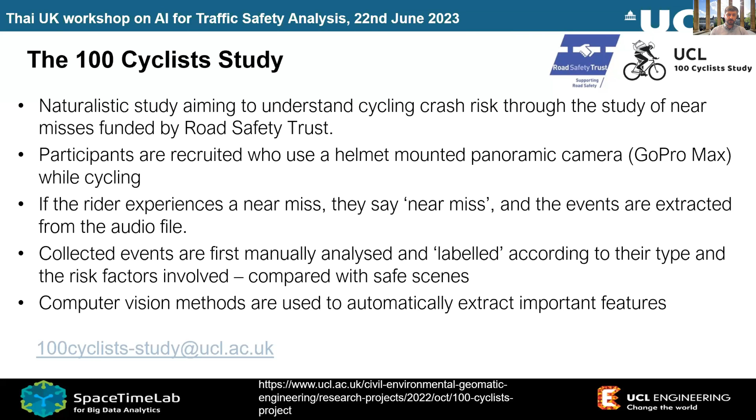So we first label them according to their type. So was it a person pulling out in front of them, a pedestrian walking out? Was it a close pass? And then we extract the risk factors. And we've used a variety of computer vision methods to do this. So this is just a couple of examples.

So my last slide before I pass over to Nachpon: how do we go from these deep learning methods to actual improvements in road safety? And this is something that Nicola was talking about earlier. We found in our study that perception of risk is quite important. So it varies between people.

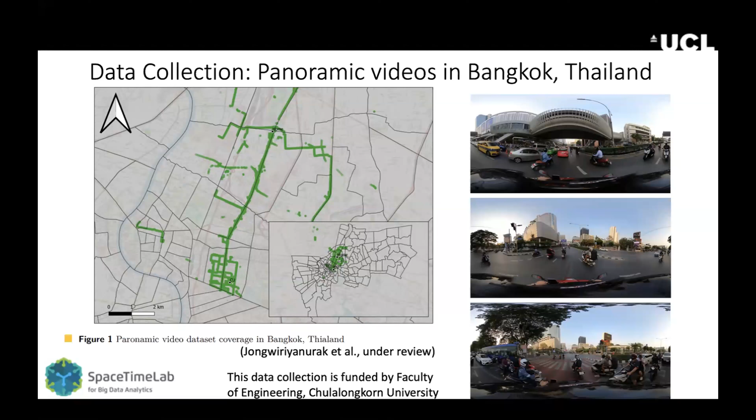On the right, you can see examples of how this video appears when unfolded. On the left, you can see the locations that I visited, which mainly include the routes from my flat in the north of Bangkok in Phaya Thai district to Chulalongkorn University.

So we have developed a proposed framework for understanding motorcycle crash risks using panoramic videos. The framework is divided into two tasks. The first task is visual to text, where we train the computer to understand the visual context by describing what it sees using descriptive text. And the second task involves utilizing a large language model. In this task, the computer is trained to analyze motorcycle crash risks by considering the road safety context using the set of descriptive text generated in the previous task.

And in the visual to text task, we further divide it into two subtasks. The first is image to text, and the second is video captioning. These tasks have distinct differences in their objectives and computational requirements. First, the image to text task focuses on understanding the static objects and the environments captured in the image. It aims to generate descriptive text based on the visual contents of the images. These tasks typically require less computational power since the images are static and do not involve analyzing dynamic elements.

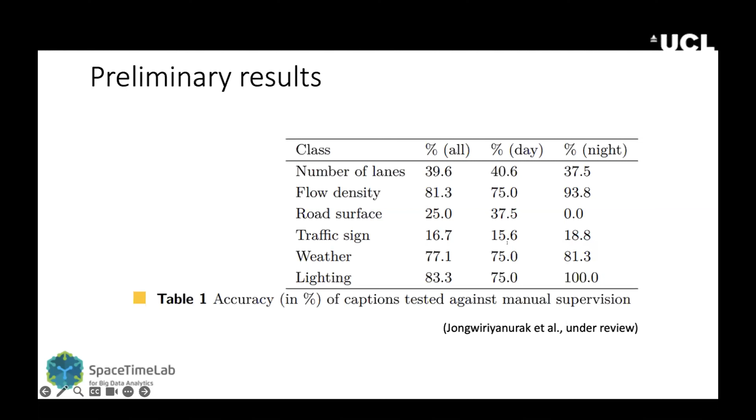For future work, we need to implement and adopt existing visual to text video captioning and large language models that are suitable for the road environment and capable of understanding the road safety context in Thailand. This work has the potential to analyze unobserved motorcycle crash risks without having to develop cases by tracking relationships of boxes that we detected. And in future work, as camera technology advances, it is expected that this framework will be able to operate in real time to notify motorcyclists of conflicts or any risks.

Thank you all for your attention. I will conclude my presentation here. So, does anyone have any questions? I have a question. Okay.

With the low accuracy of some of those attributes that you described, so the lanes and the road surface, can't you just supplement that through GIS databases that would automatically give you the number of lanes, for example? Obviously road surface is different, but could that be, you know, if you did like a ThaiRAP type assessment of that road and it was in there, could that also supplement the accuracy of those videos? I was just thinking that the most important thing is about the behaviors and the kind of dynamic attributes.